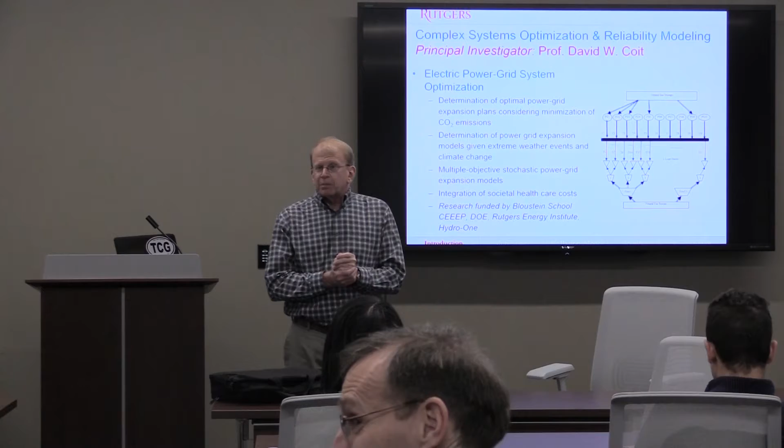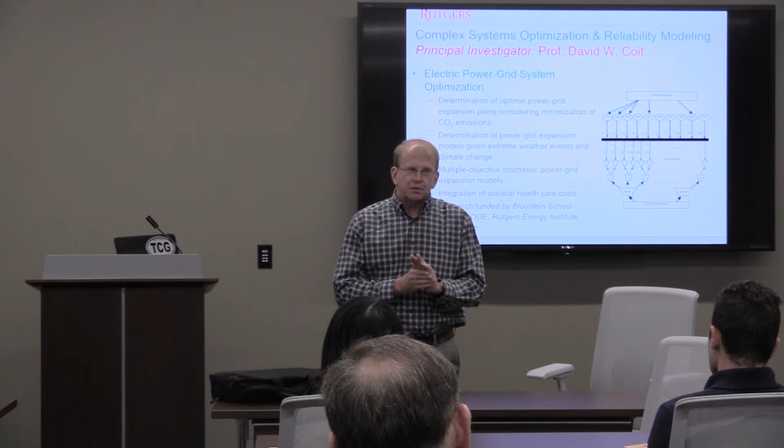And he said, I read your paper, and as professors, we're never quite sure. He said, I read your paper, and it's of no value to me. I said, okay, thanks for the feedback. He said, however, if I gave you a small, well, he didn't use the word small. If I give you a research grant to fund you, it might in fact be of value to me. So I said, okay.

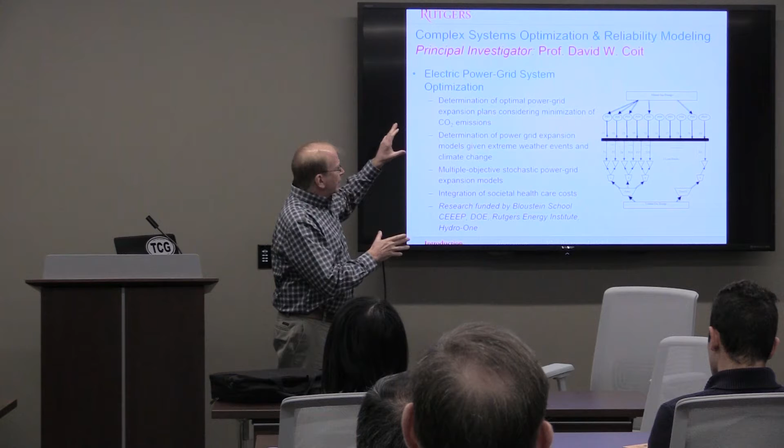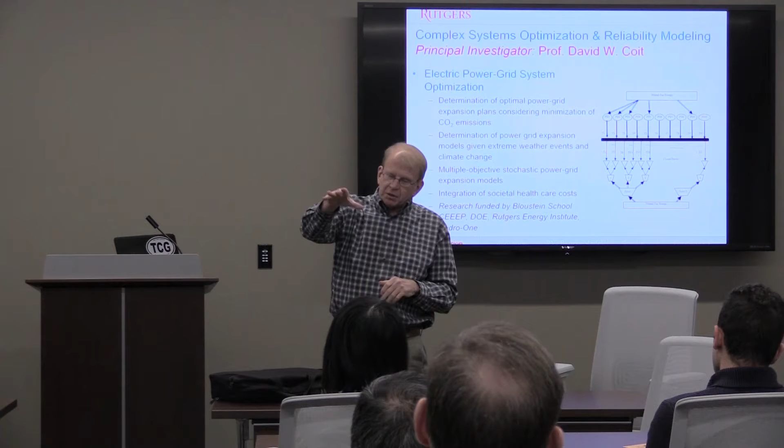And that started about 10 years ago, my work in complex system reliability. The system originally was the distribution system, the final stage of the electrical power grid: generation, transmission, distribution. But then later it expanded to transmission and generation. Originally, all my work was focused on reliability of those systems. But then we actually even took the reliability part out of it. Some of my recent research projects have to do with expanding the power grid to minimize CO2 emissions, with an objective function with healthcare costs, which can't be estimated except through a simulation model, things like that.

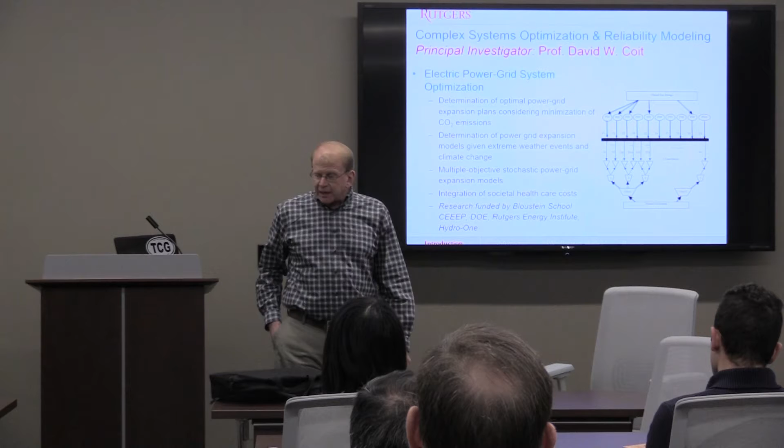We had Hurricane Sandy in New Jersey several years ago. And it wasn't just New Jersey, it's everywhere. The emphasis seemed to shift, but for us in New Jersey, Hurricane Sandy wiped out towns along the ocean that haven't recovered. The issue switched from reliability to resiliency. And so resiliency, there's different metrics with that, but it's the ability to respond effectively and in a time-efficient manner to some extreme event, whether it be a hurricane or a tornado.

So this gentleman here, Dunbar Birnie, he's the Rutgers expert in PV, photovoltaic arrays, among other things. He's in the material science department. He asked me to start to work with him. And so today's talk is something that's new for me. As she said in the introduction, I've been working in reliability many years. This is something that's just within the last year or so.

So this talk today has to do with resiliency. If some critical asset, a hospital, manufacturing facility, a school, which is connected to the power grid but becomes disconnected from the power grid due to some extreme event and is operating in an island capacity, how can we continue to meet the demands for electricity given the uncertainty of when the power will be restored? So that's today's talk.

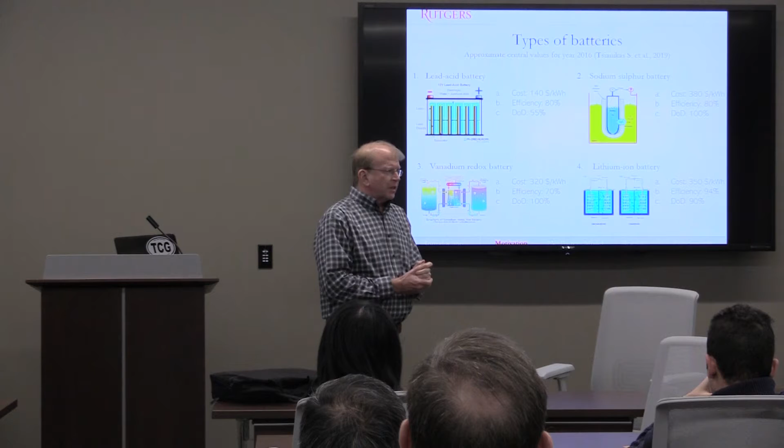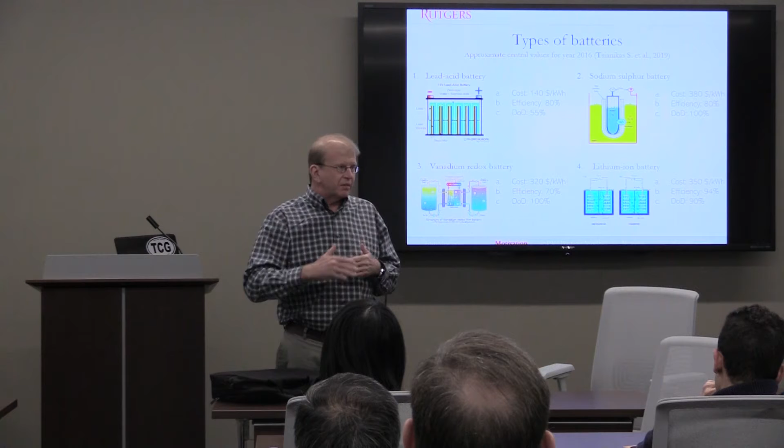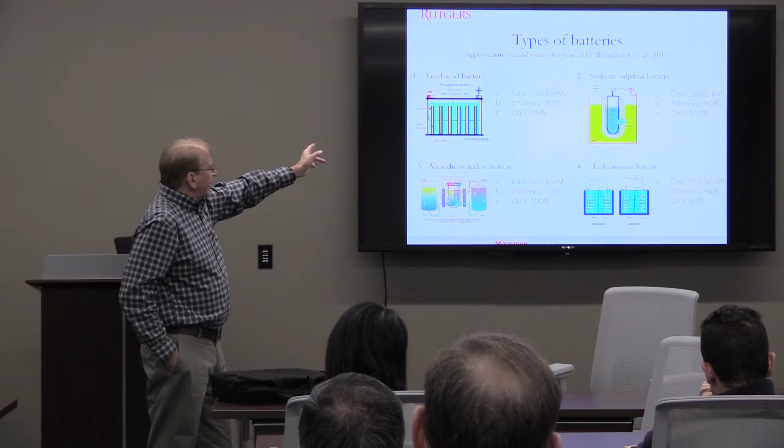So the whole idea is batteries, which right now are very expensive, but the prices are going to be decreasing, at least that's certainly the projections. There's some different possibilities of adding batteries, and as I'm assuming almost everyone here knows, there's other ways to store energy. In the US, and I would assume all countries, we generate electricity to match the usage of electricity. As the demand goes up and down, the generation goes up and down. There isn't large-scale storage. If there could be large-scale storage, then there would be benefits, including my talk today. So types of batteries that possibly could be used, different efficiencies, different costs. And probably, I don't know if it's true for every technology, but costs are anticipated to decrease.

So our research objective is a simulation-based optimization model, where the goal is to meet the demand for electricity during the outage periods over some planning time horizon. And some sensitivity analysis, which is interesting, but probably won't have time to talk, but very important then is finding this trade-off between battery price and VOLL, value of lost load. So this means the cost when electricity is not being supplied and demand is not met. So in a manufacturing facility versus a hospital versus a school, you would have different values.

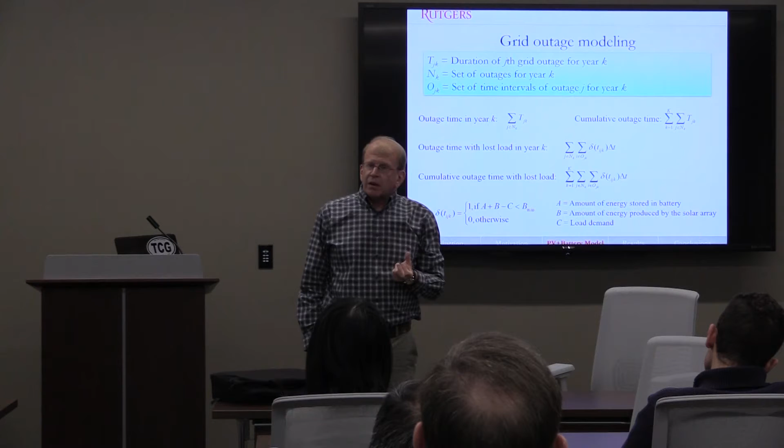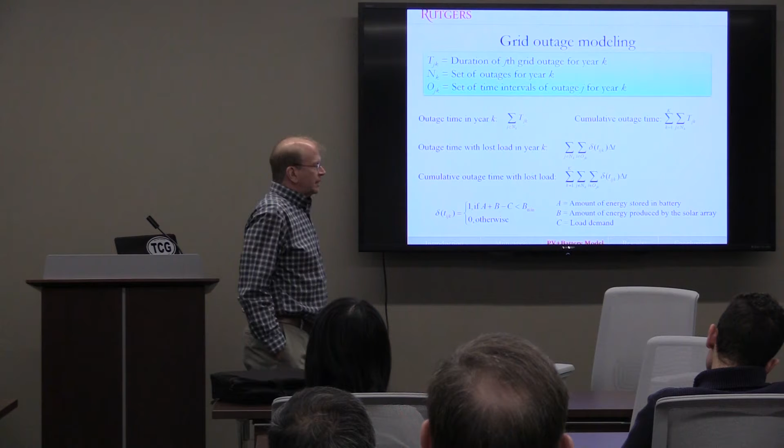Now, the hours that demand was not met. The set O represents the hours while there was an outage. So in some of those hours, we can meet demand through the PV array, married with the battery, and in some we cannot. So we create a delta function. Year K, outage J, hour I, time has been discretized. The delta function is either a 0 or a 1. Delta T is 1 for 1 hour. And the battery, if it's reduced to a minimum of Bm, that's not 0, cannot then meet the demand. There has to be some minimum storage within that battery.

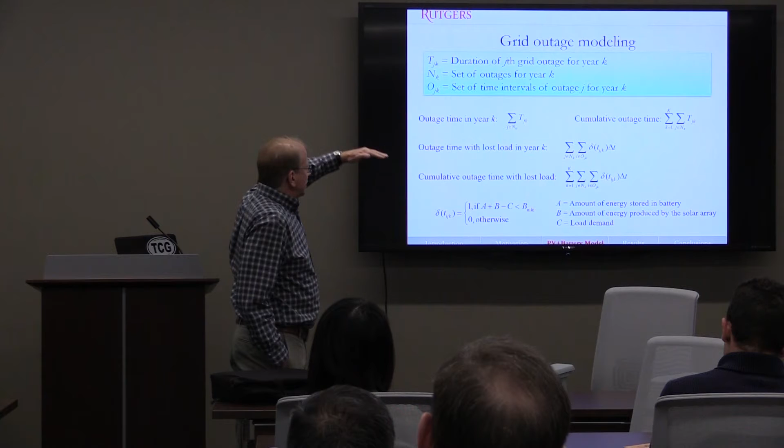But it's simply 0, 1: the amount previously stored, plus the amount of energy produced by the solar array, minus the demand in that particular hour. And if it's less than the min, we have an outage, 1. And then, so the cumulative outage time, the lost load, but then I'm summing over all K years. So this is the number of outages in a year. Outages are random. This is the model we used.

For the electrical distribution, it's kind of interesting from an industrial engineering perspective. My personal feeling is that IEs can contribute to energy very effectively. Because what many of these energy planning problems, resiliency, are is how do we use existing assets or resources optimally and efficiently to meet some demand. So it's naturally some optimization model.

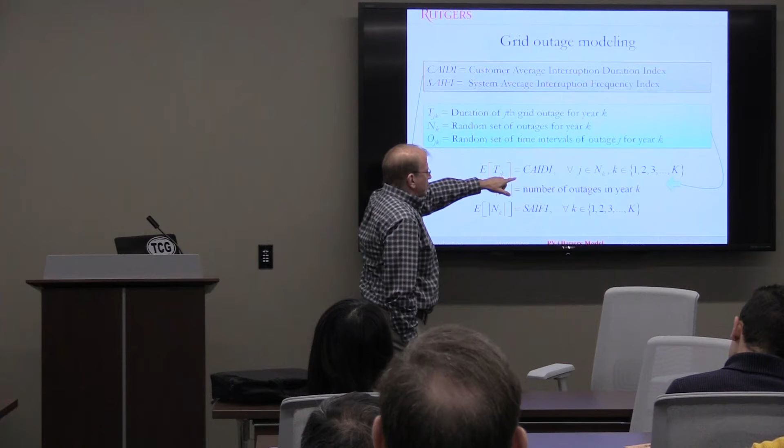However, if you work with people in the distribution industry, they use terms like this: CAIDI, SAIFI. These are the people who are actually fixing the equipment. CAIDI, I always struggle with this, but if you focus in on the fourth letter, duration, frequency.

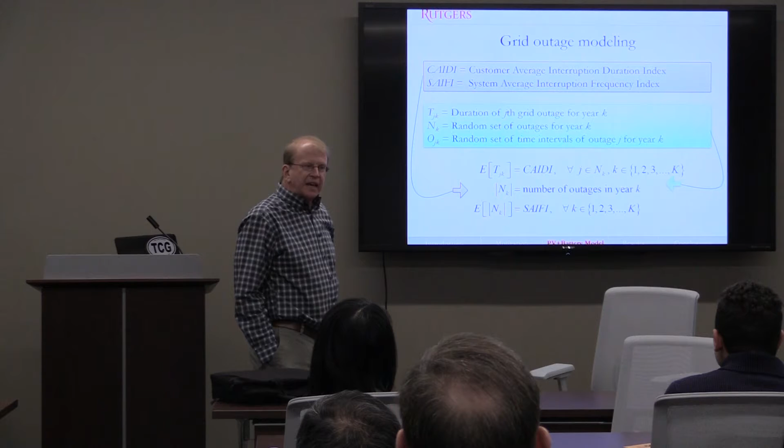So SAIFI, oh, good, I have it up here, because I was stumbling over what it stands for. System average interruption frequency index. This is the data that the power utilities have to supply to the government. CAIDI, SAIFI. So we use that in our simulation model.

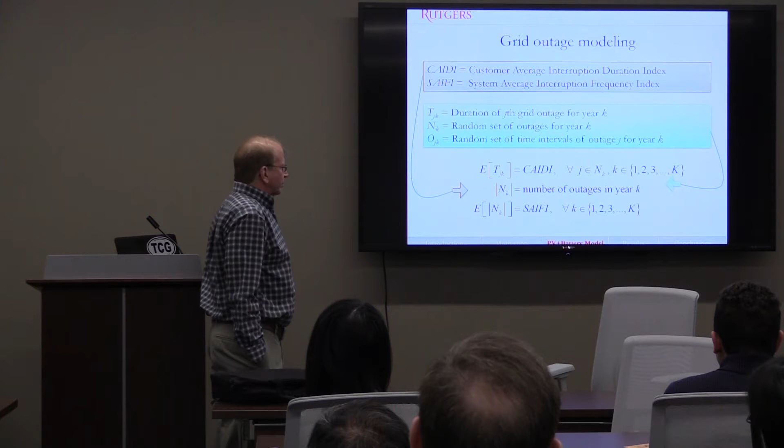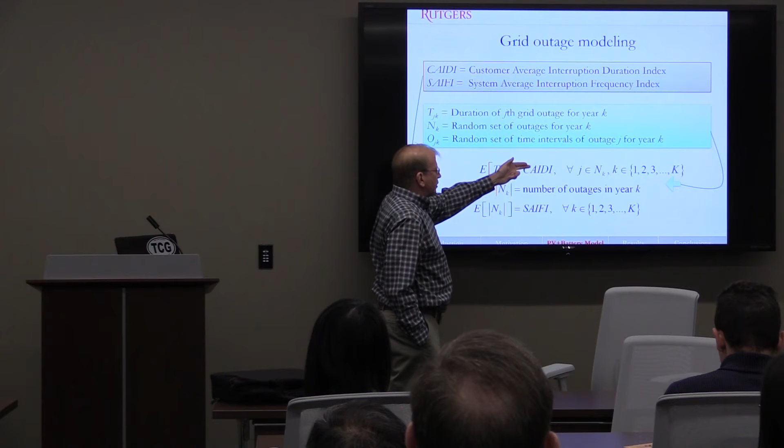The CAIDI, the duration, is the expected outage duration. NK, if you remember, is a set, the number of outages in year K. So the cardinality of the set, or the expected cardinality of the set, is SAIFI. So in our optimization model, we use these terms, the actual numbers in some location in Long Island, as part of our simulation model to define the distributions for our parameters.

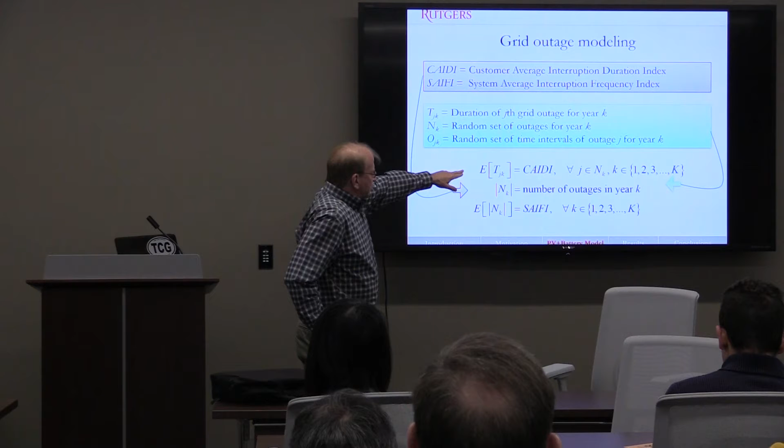My objective function in this optimization model: investment cost, and then, as I've already explained, the value of lost load. The outage duration, cumulative outage duration, given those equations I showed previously, multiplied by the value of lost load. The value of lost load is a concept most engineers have some difficulty measuring, but it's something business people, economists study, and they publish numbers. The value of lost load for different industries.

Every number we used in this paper can be documented. We have a reference for it. Again, we're industrial engineers, we're modelers. We need references for these.

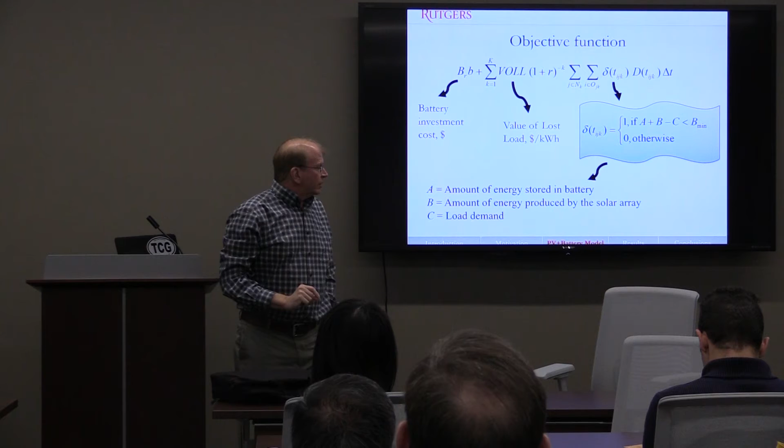So our objective function, the battery cost, this is the equation I had previously. If you can recall from a previous slide, the delta function, again, for that particular time I, outage J, year K, have we met the demand or not? If it's a 1, that means we have not, so the whole demand multiplied by the duration, multiplied by the value of lost load, and we're discounting it back to time 0 to create a present value. So this is our objective function.

I think I have some animations here. No. Then we have constraints. We solve this problem sometimes with the constraints and sometimes without the constraints. So we constrain the expected value of the loss of load probability, less than or equal to some number alpha, usually 0.1. Could be anything, of course, in our model.

In other words, once we become disconnected from the grid, we want the probability that we cannot meet demand to be less than 0.1. You could obviously pick another number, but you would have a more costly solution if you picked a smaller number. But this is overall for the planning horizon.

For some individual outage J year K, the loss of load probability for that particular outage, or our estimate of it, I should say, is a random variable. So we want the probability that for a random outage it is less than beta, which may or may not be different than alpha, in fact probably will not be, to be some high number. Because that's a random variable. So I can't solve an optimization model with a fixed constraint on a random variable.

So I've put all this together and created my optimization model. I teach optimization. I'm an industrial engineering professor. You give me a problem to solve, at some point, I usually turn it into an optimization model. That's the way I think. I think that's the way many industrial engineers do.

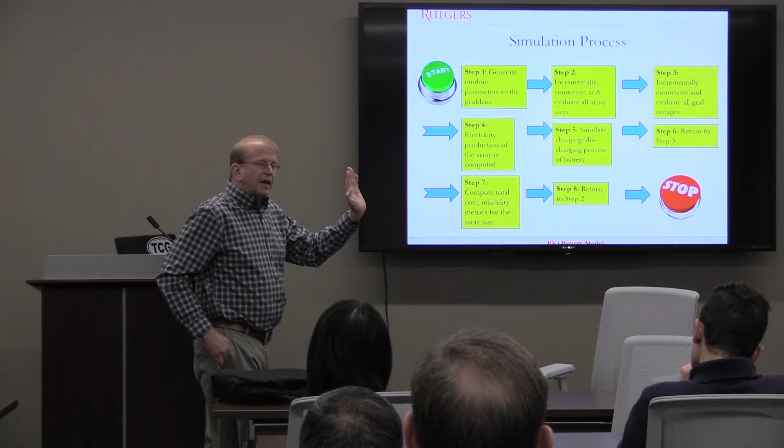So we randomly select the outage time, and we have actual demand data, and we have the duration as part of our simulation where we've simulated from that distribution. And we have the solar irradiation data, the actual data. We then use that to multiply the peak function. And then because it's a simulation, we need to do this over and over again, many, many times.

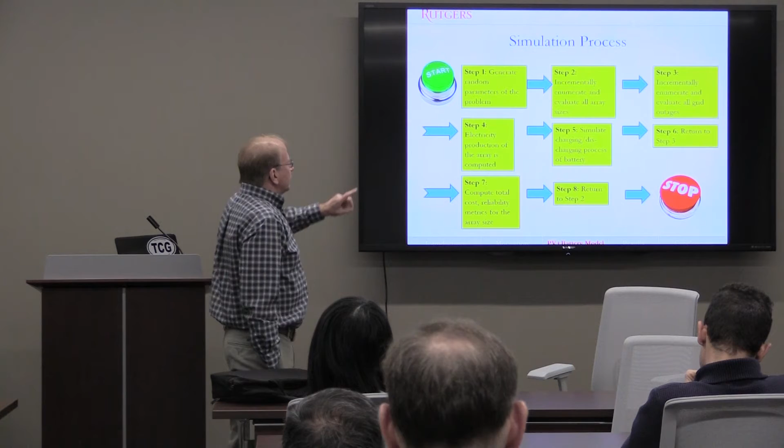If there's a better way to solve this, we'd like to. We can formulate it more as some sort of stochastic problem without using simulation. We're going to continue to work on this for many years, presumably. But these show the steps which we conducted. That's basically what I said. This is what I just said.

I should have waited to this slide, but starting time is uniformly distributed. It's uniformly distributed throughout the day. It can happen morning, night. For us, time is discrete, 1, 2, 3. We have an adjusted Poisson distribution. If there's an outage, we don't have any outage durations of 0, so it's adjusted by 1. We do make this assumption, battery is fully charged.

Our example for the paper, we actually did many examples, but the example for the paper is the same example I'm showing to you today, a hospital on Long Island. Our first version of the paper, we had 4 different examples, 2 manufacturing facilities, a school, and a hospital, but the paper was much too long, and so we ended up with just this hospital in Long Island.

All value of lost loads were from a reference source. It's not for us to say what that number should be. That's for a hospital, the cost or equivalent costs associated with not having electricity. We considered array size as 200 to 10,200 battery capacity.

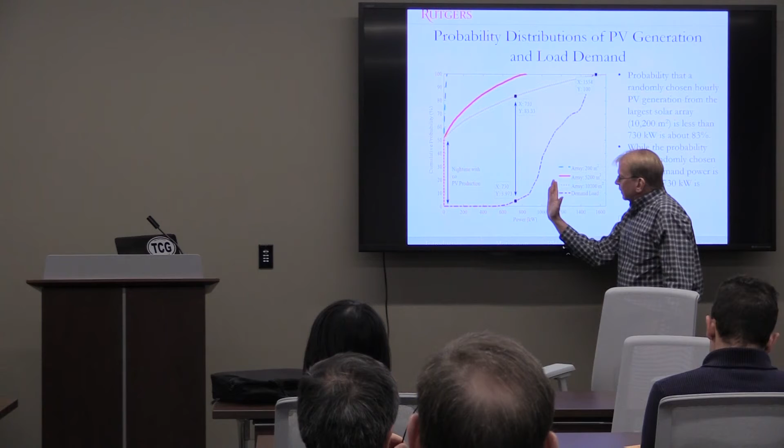Okay, first slide. Now this is a very important slide. This is 3, actually 4, because there's one up here. Cumulative distribution functions. The purple one is demand. So these are CDFs. So we see the demand for electricity at this hospital is right around here, where the CDF goes from low to high. These 3 are the cumulative distribution functions for supply, for the PV assembly without the battery. They start at 0.5 because there's a 50% probability that the hour where there's an outage will be at night.

So we can see that these lines don't intersect, and we can see that if this system is disconnected from the power grid, the PV assembly, which is effective during regular operation, is not capable of meeting the demand for electricity, basically ever.

My student, he's a great student, Stamatis, he's really doing this. He prepares a lot of these slides for me, and because I'm very thankful for his support, I do take some out. Some pass the line over what I feel comfortable presenting, but he says, this is a problem. It's because we can't. The whole point of the PV is resiliency, and this does no good.

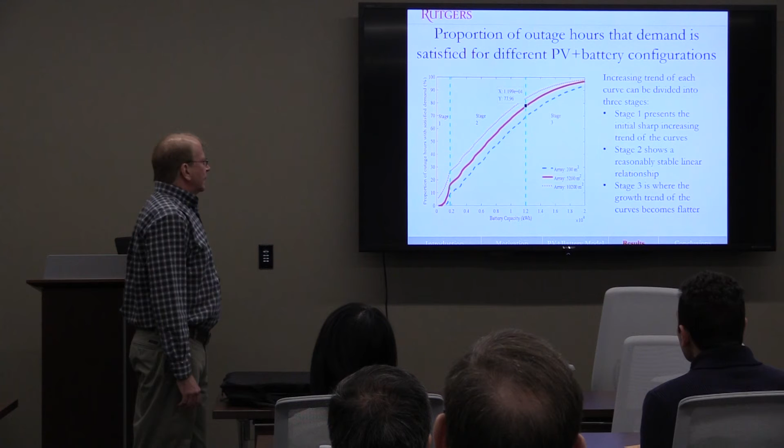Now, as we start to add battery capacity, things change. We have 3 different array sizes, and what we're doing is adding battery capacity. Again, this is all for that hospital in Long Island. Along my other axis, we have the proportion of hours where we can satisfy demand. On the cost graph, at first we thought there was a problem. We started to add battery capacity for these typical array sizes, and it stayed right at 0. And we thought that was a mistake.

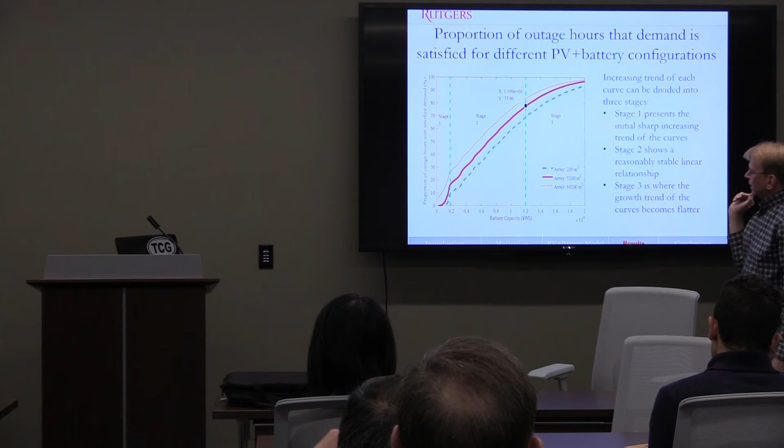But what's going on is, with a small battery, you're only adding cost. It's not sufficient to meet the demand. You'll see on a cost function it only gets worse. But then it starts to increase dramatically. So these green dotted vertical lines are somewhat arbitrary, but we're saying it's in 3 stages: no increase, a sharp, somewhat linear increase, and then diminishing returns, where of course the cost to add battery capacity will still be linear.

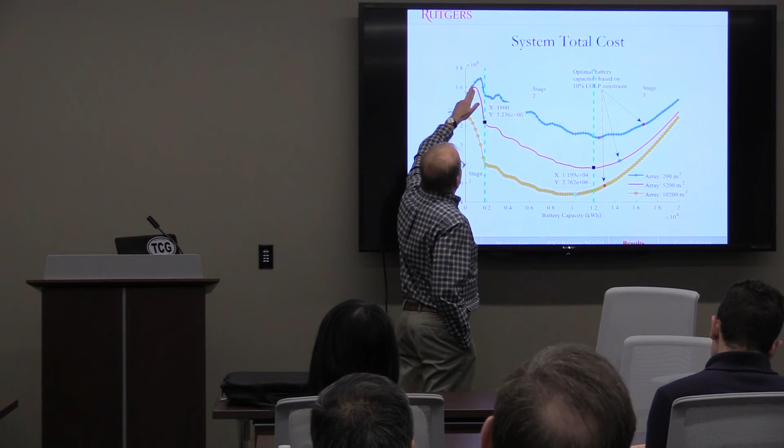So as we add battery capacity, we can start to meet the demand, because of course we're going to charge it up. Again, our model assumes it's fully charged when we are connected to the power grid, and then we continue to charge it when it's daylight. This is the cost objective function. This is what I said before. This is a very big array size. But for the smaller array sizes, as you start to add capacity, the cost just goes up. But then it starts to go down.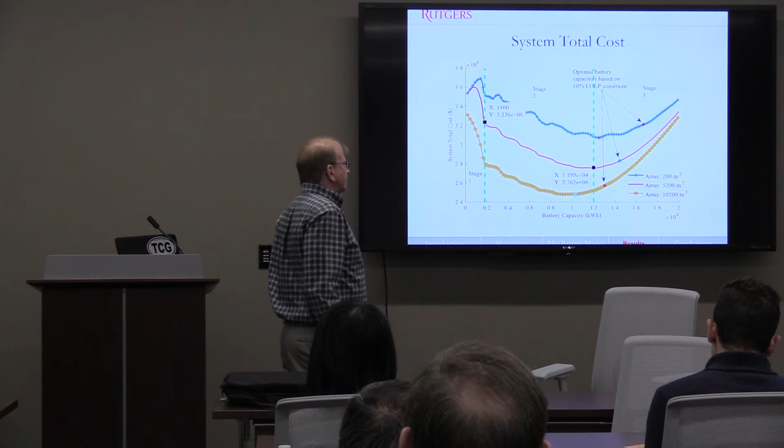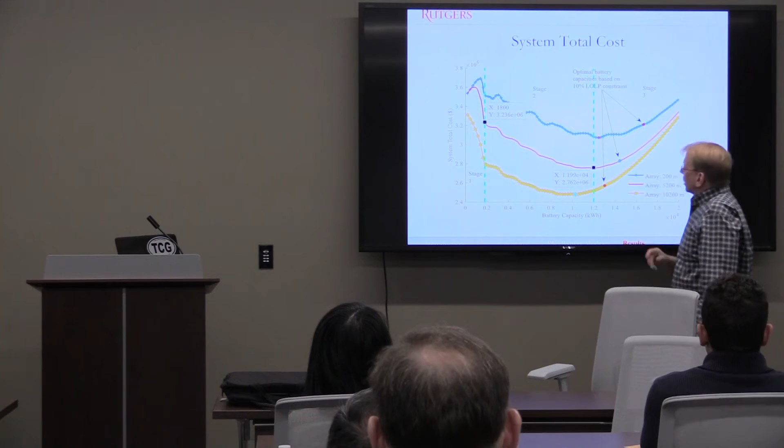The minimum cost points here and here are without the reliability constraint. These minimize cost, the battery cost plus the value of loss of load. We add the constraint that loss of load probability is less than 0.1, and then the battery capacity and cost increase here, here, and here for these three array sizes. So not too surprising, if we want reliability in addition to minimum cost, we need, I misspoke, I said larger array size. Well, that helps too, but I meant larger battery capacity.

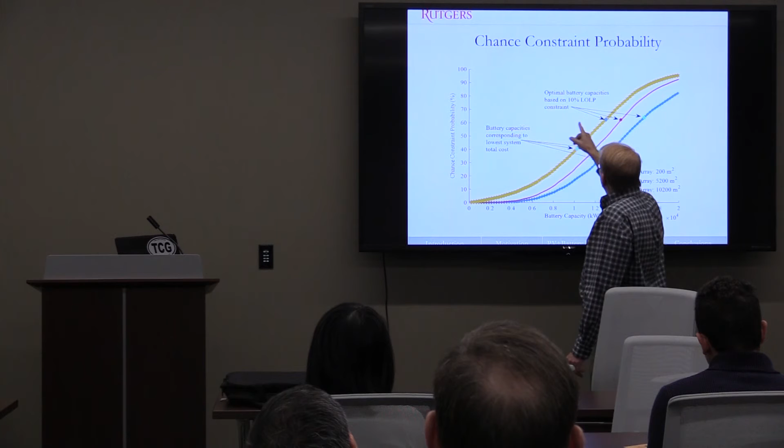This is the same data. This shows the proportion that we can meet the constraint on the random outage duration. For those solutions that minimize cost, not very well, 40%. But even as we add the constraint so that overall loss of load probability is less than or equal to 0.1, for an individual outage, it's only about 70% that we will meet that.

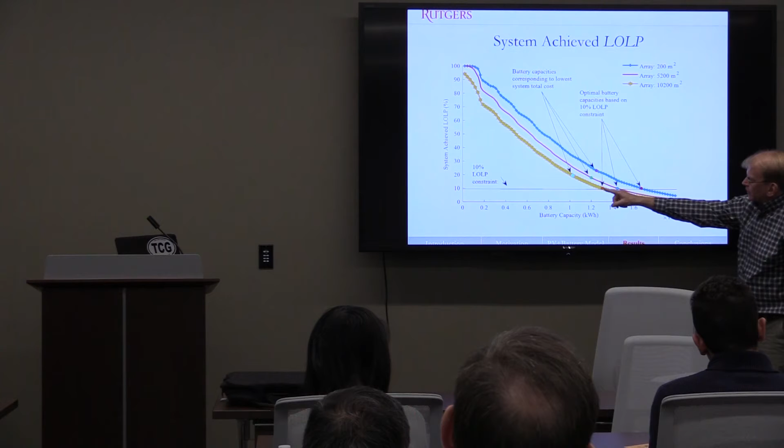This is the overall system achieved loss of load probability. As we add battery capacity, the probability we're not able to meet demand gets less and less. This is all the same data, just presented three different ways. Now, there's going to be one of my very last slides; I think I recreate this on the left part of that slide. But notice that if I constrain the loss of load probability to 0.1, the optimal solution puts it exactly at 0.1. So the constraint is tight, not surprising.

But what you'll see towards the end, if we recreate this analysis with anticipated future lower costs, that will actually not be true. We'll be able to meet that constraint and surpass it. But right now, it's not surprising. I'm putting a constraint on reliability. We're going to meet that constraint and not a little bit more.

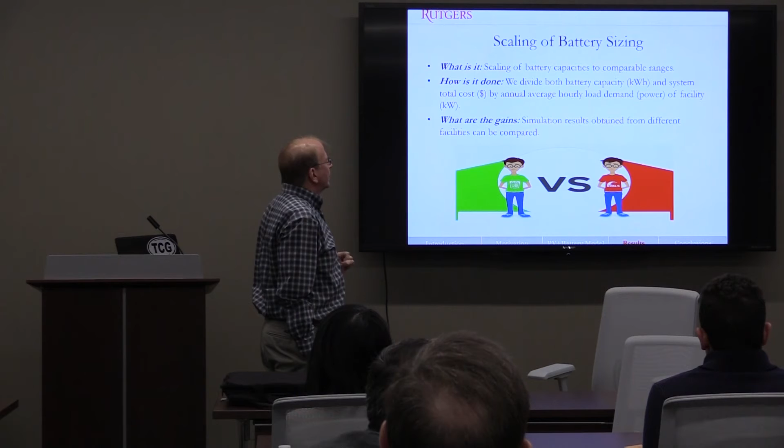So now, the next portion of this talk is value of lost load. It's a number that's estimated. It can vary. Similar analysts, or different analysts, could get different measures for the same facility. Battery price is changing. So we're working on the next extension to this paper; we've created a much more rigorous model, I hope. And we're trying to explore the relationship between value of lost load and battery prices. And we're trying to create a model such that the anticipated trends in battery prices are built into our model. That's currently not the case.

And I have many of these plots, and they're sometimes hard to decipher. Our original work had 4. And I think in the original presentation we tried to describe all 4 of these. And it's too long, number one, and started to get very boring because there are some trends that are the same. But the hospital was just something that we demonstrated for today's talk. We did also similar analysis for a school, hotel, small office, and big office. And what really changed? Well, a lot of things, but the model was basically the same. The demand for electricity changed, the value of lost load changes. But you can get very different answers.

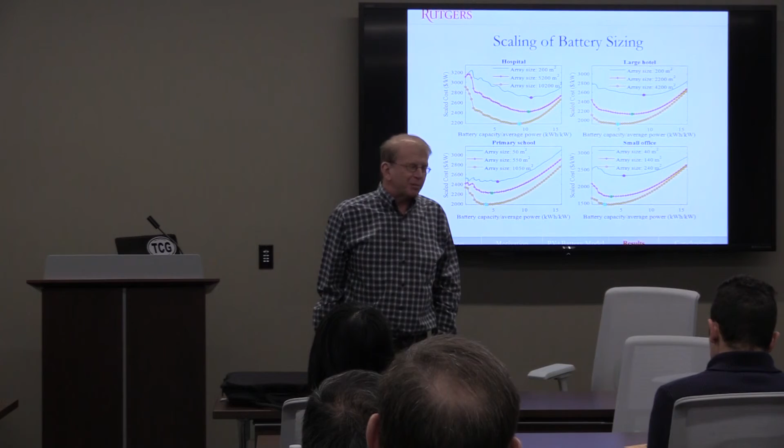And then our colleague in material science, he's very practical. I mean, good IEs should be practical too, right? Department chair. But sometimes we think we have more theoretical models than conceptual models. And so he says, well, the people reading this paper probably aren't going to have a hospital. And if they do have a hospital, it's going to be maybe a different size. So we scaled cost, scaled battery, and provide graphs that give a tool in these 4 general categories to select battery size for some customized demand. Trade-off between battery price and value of lost load.

The cost parameters we're going to use, you'll see the parameter TSC, total system cost. This would be the cost that minimizes total system cost without considering the reliability constraint. And then optimal TSC is with that reliability constraint. In every example I did today, the reliability constraint is 0.1 or 10%. Could be, of course, different. So my students have done many, many of these plots. Okay. The analysis I showed you earlier today was for a battery price that we looked up and the value of lost load that was documented.

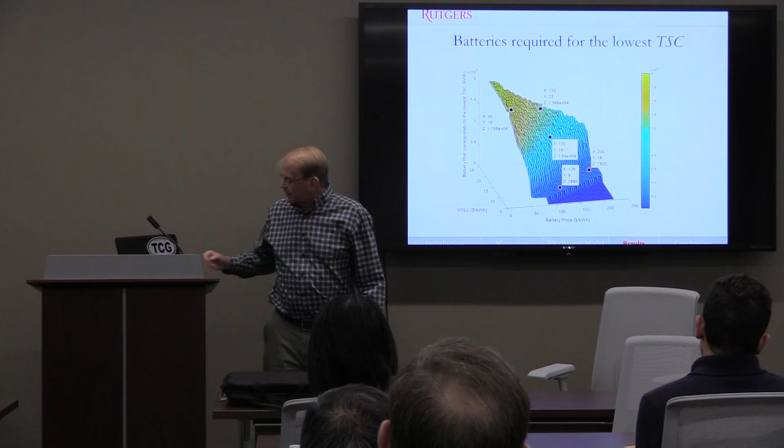But in our sensitivity analysis, we considered, well, battery price is variable. Value of lost load is variable. Differently, though. Value of lost load will vary based on the application. Battery price, well, we don't know the future trends, but it is going down. So some interesting results here. If batteries are very expensive, and it doesn't cost very much to have an outage, not too surprising, don't get a battery at all. And of course, we can then conduct a sensitivity analysis and see the others. Same data, just it's a little hard to visualize it this way. This is the lowest TSC without the reliability constraint. The plot's very difficult, but we can then make some conclusions about the relationship with value of lost load. I'll skip through. I have many of these plots, and I'm starting to run out of time.

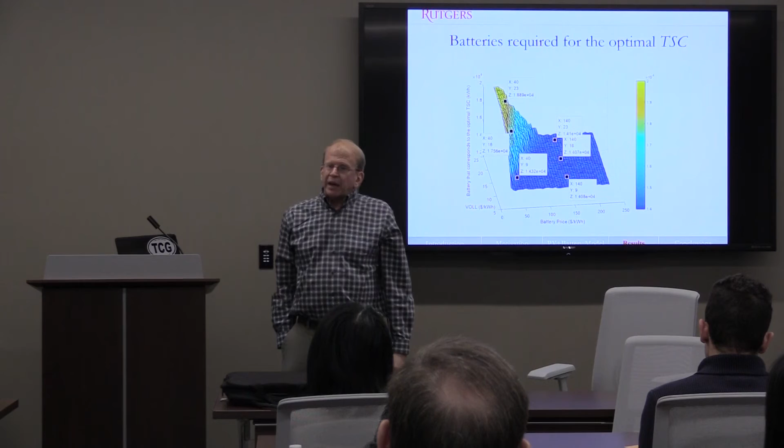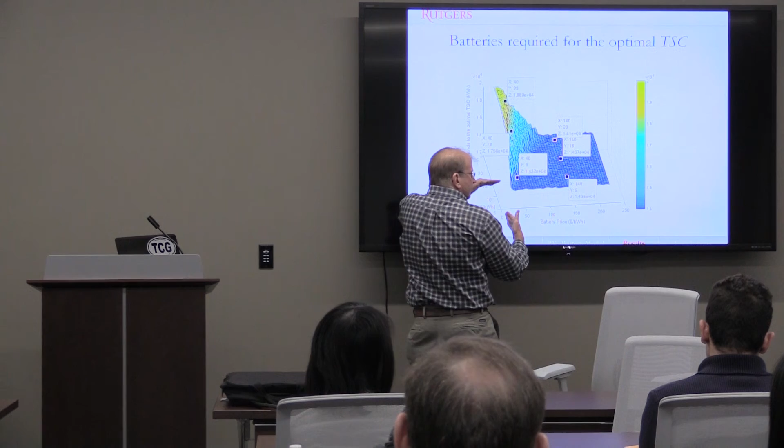Now, this is the same model, but now with the constraint on reliability. So you notice we never go down to the floor. Once again, battery price, value of lost load. So battery price is high, but you notice a much larger flat surface here. This means we're meeting the minimum requirements to satisfy the reliability constraint. If battery prices could get sufficiently low and value of lost load gets increasingly high, we're going to then get a battery larger than the minimum that will satisfy those reliability constraints, because the outage costs will be more important. So that can happen two ways. Value of lost load can be fixed and this is decreasing, and that's what we actually think is going on. Or, of course, the reverse.

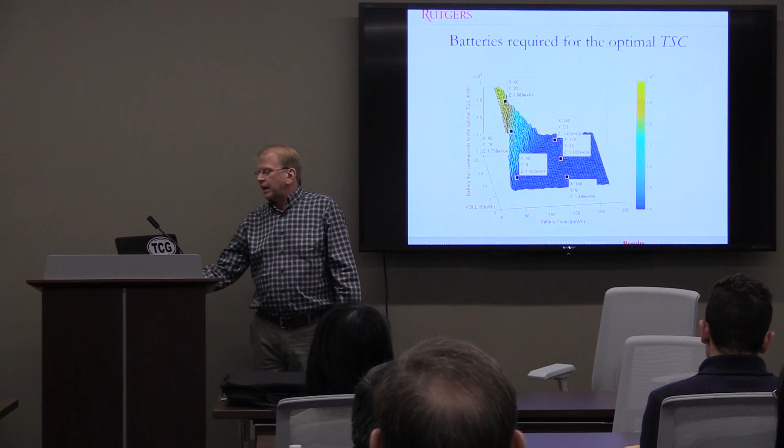Same data, just, we argued. What's your opinion? Is that too confusing? Probably. So we did it this way as well. And things to notice.

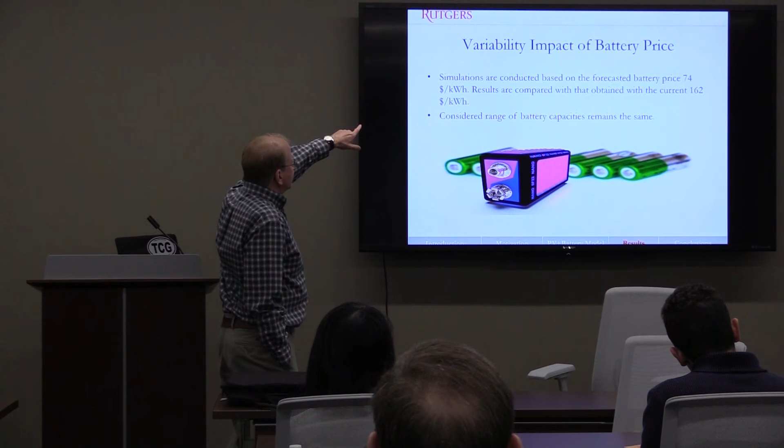So, this is after the first paper was written. We researched what different people have predicted. The number we used for battery price is $162 per kilowatt hour. There have been projections that this will drop as low as 74. So we recreated the whole analysis with 74. Of course, we have an optimization model; we can use it for any set of variables.

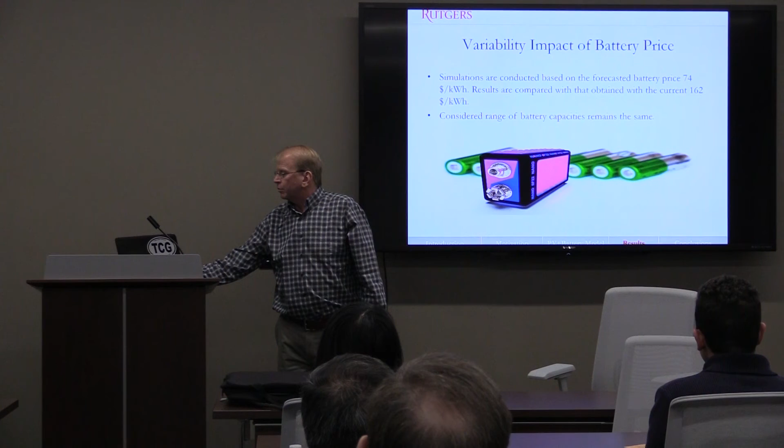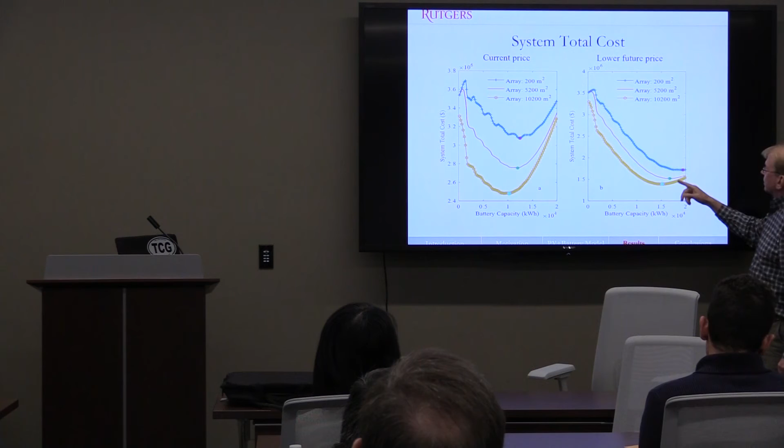And this is, I don't know, in one sense, the most valuable plot of my talk, if there's any. As battery price goes down, it's not a big surprise, we can afford larger batteries. So the minimum overall cost, assuming both value of lost load and battery, takes place at a larger value, and that's obvious actually.

But then this is the plot that's more interesting. So now this is the battery capacity versus the achieved overall system loss of load probability. This is the data I already showed you. If we want to minimize cost, we have battery capacities here. If we want to minimize cost and also meet the reliability requirement, our battery capacities are up here. And then this is the best good news in this.

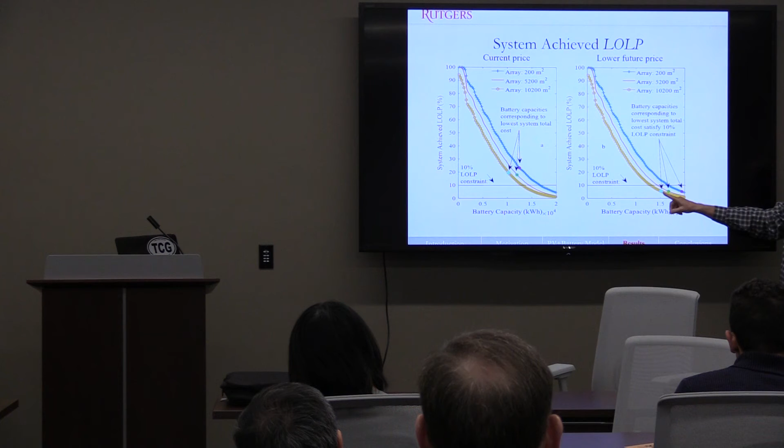If battery prices actually decrease to the projected amount, we can get a larger battery capacity such that we can meet the reliability constraint, but where the minimization of total cost takes place, it actually surpasses that, which means finally we're at a point, based on all the numbers we've used in our model, and we can find perhaps some criticisms with that, in the projected future,

where the integration of batteries with a PV array for a system like that will truly be cost effective and meet requirements for reliability. And we say resiliency in this paper because the whole idea is demand for electricity is met while power is being restored. So the system becomes resilient.

Again. All right. Again, he's a good student. He'd feel hurt if I took some of these things out. But he's saying, oh, that's good.

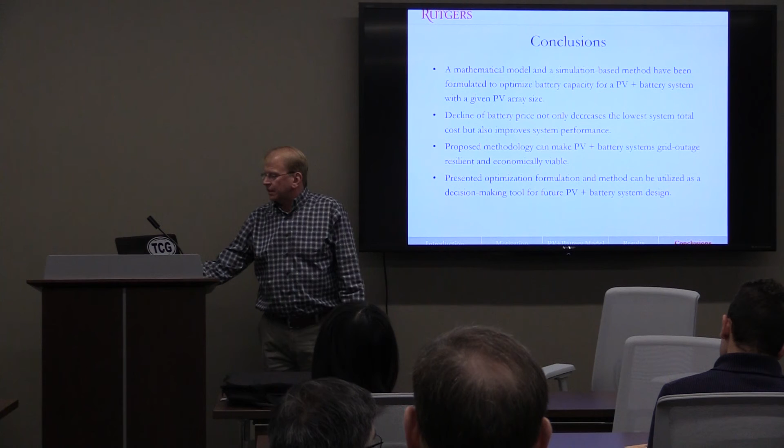Those are good results. So conclusions: we developed the model. This is the first paper I've ever done in this domain. It's been published. It's gotten a good reception so far. We have at least two more extensions of this plan. We can see the effect of the declining battery prices. It shows we can make the systems both resilient and economically viable. And this provides a decision-making tool for a system that's resilient in the island mode.

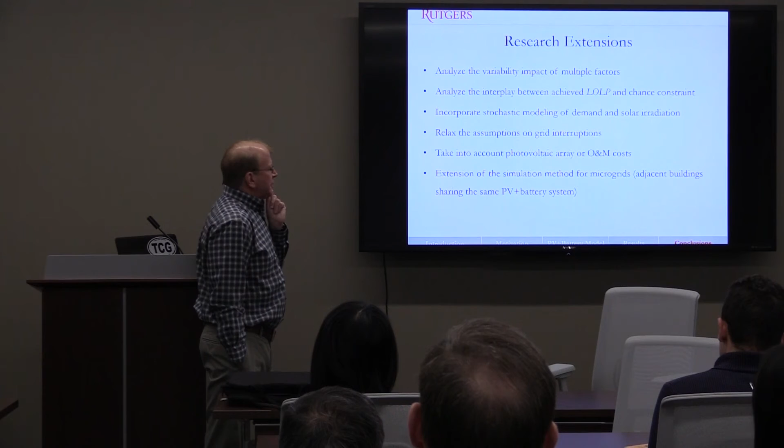Here's how we're going to extend this model. It's already a stochastic model with variability. We want to analyze some of that stochastic behavior more, make the model better. Demand and solar irradiation: in our current model, as I've already stated, we have a year's worth of data for demand and a year's worth of data for solar irradiation. We treat those as deterministic numbers. They're hour by hour, but we assume they repeat themselves over and over. In practice, the demand's a random variable, and the solar irradiation is a random variable. So that's something we've spent a lot of time arguing on. And so we want to relax some additional assumptions.

We want to, again, address the price of photovoltaic array costs and operation and maintenance costs. We're also assuming, and my main research for many years has been reliability, that the power grid, the PV array and the battery don't fail randomly while this is taking place. Again, that's something we need to consider as well. So that concludes my talk. Thank you.

Questions? Yes, sir. So I know that you said that you were going to maybe in the future consider O&M, but it seems to me that battery aging and degradation might actually play quite a bit into this. If batteries have to get replaced every 5 to 7 years, say like in your car or in your cell phone, I'm not aware of a type of battery that doesn't have a relatively finite life. What are your plans to incorporate that?

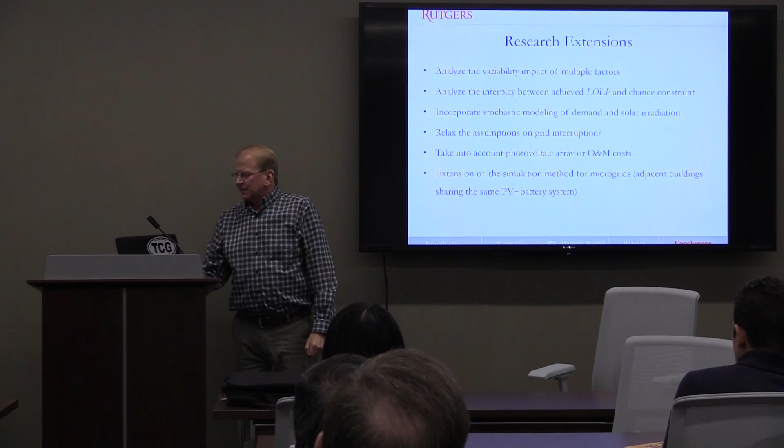Yes, sir. I have some questions related to your recommendation. Can we go to that page? That position. Yes. So here you're using multi-objective optimization. So does it matter involving different terms? I'm going to argue we are not.

I think you're calling it multi-objective because I have a battery cost now, and then I have outages in the future. So I think the way you meant the question is I have multiple objectives. But I'm going to argue, no, I'm not. I'm discounting the future costs, year by year, back to time zero, with the value of lost load numbers. So this is present value cost plus present value cost.

So the point I'm trying to make is I'm not doing that because I've written a lot of papers on multi-objective optimization, and I'm very sensitive to apples plus oranges. Well, that's one thing. But the units, of course, are the same. Yes. But my point would be, it's possible one of the terms dominates. Yeah, sure, absolutely. So the other one goes away. Yeah, basically, the other one doesn't matter. Absolutely. In fact, we saw it.